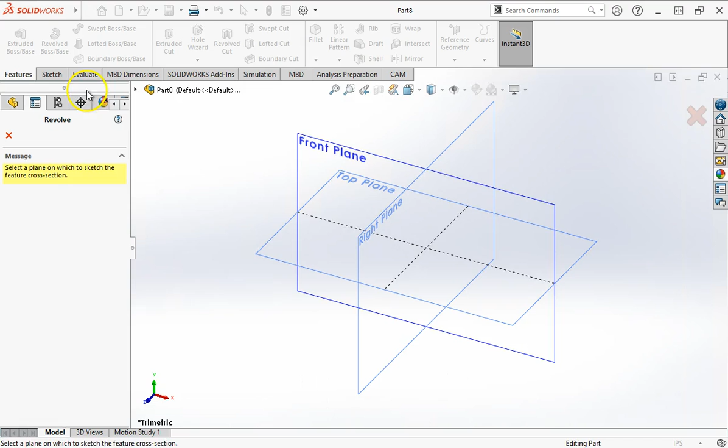For this video, I'm going to start off by making a sphere. So, Revolved Boss/Base, located up here in the Features tab. When I click on that, I'm going to go ahead and select the front plane.

Whenever you use the Revolve tool, the first thing you need to do is draw a center line. I might as well draw that center line now. What you're going to do is draw something and put it on one side of this center line. Then when you go to extrude it, instead of that shape extruding out, it's going to extrude around that center line.

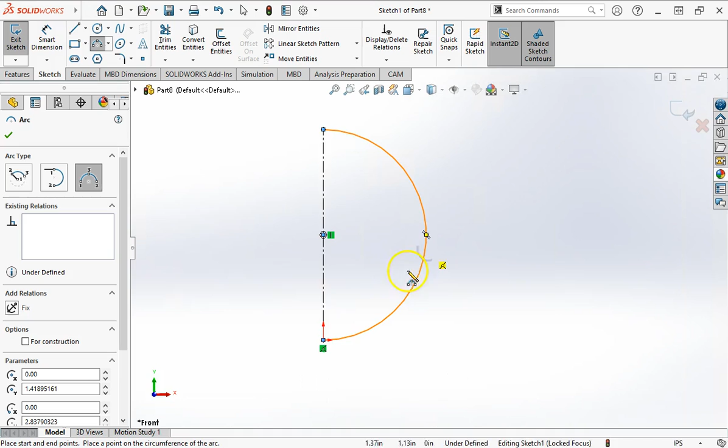So if I wanted to make, let's say, a sphere, I could go to the 3-point arc tool and make an arc from there to there. When I click Exit Sketch, it says the sketch is currently open. Do we want to close the sketch? Yes, we do. So I'm going to click Yes.

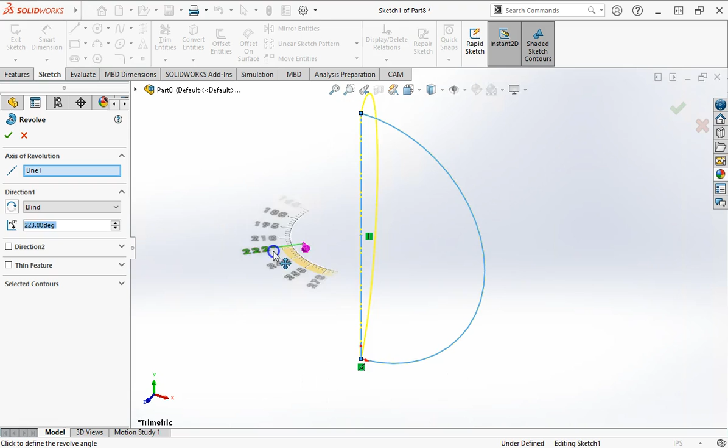We can see what happened: that half circle revolved all the way around the center line. You don't have to go all the way around. You can adjust if you just want to revolve, maybe just 180 degrees. You could do something like that, or you could just go full 360 degrees. And there you have a sphere.

Let's try a little something different. I'm going to go Revolved Boss/Base again, and let's go and make our center line.

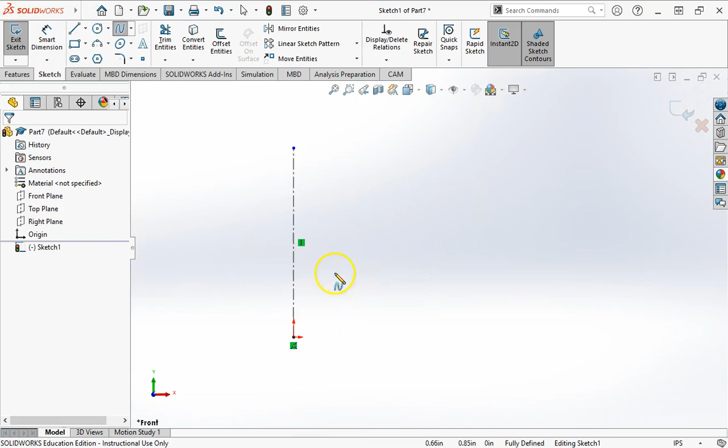Now you can do it with line tools and spline tools and things like that. The thing you just have to be careful of is when you're drawing, make sure you don't cross over this center line. So you'll notice when I'm doing this sketch, what I'm doing is I'm keeping everything on one side of this center line.

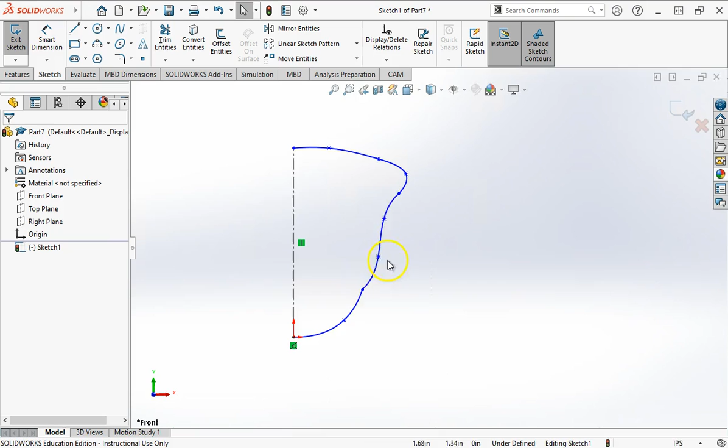I've kept it all on the right side so that when I click Exit Sketch, I can click Yes, and then it's going to revolve around.

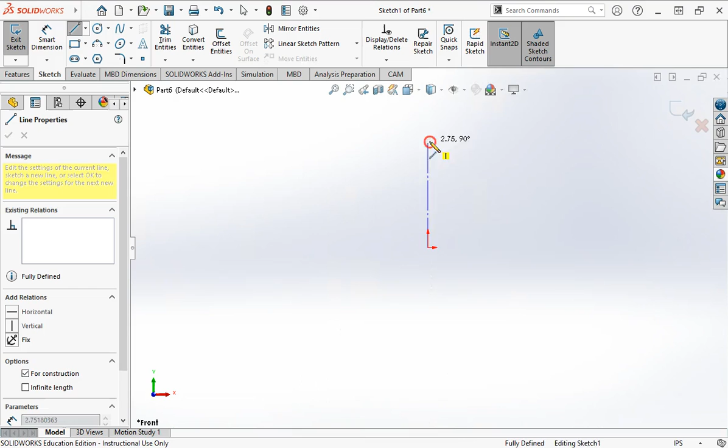Now in both of those cases, you noticed I would start off with my center line, and then my shapes were kind of attached to the center line. You don't have to do it like that. If you want to, you could draw a shape away from the center line, something like that. So it doesn't have to be touching it.

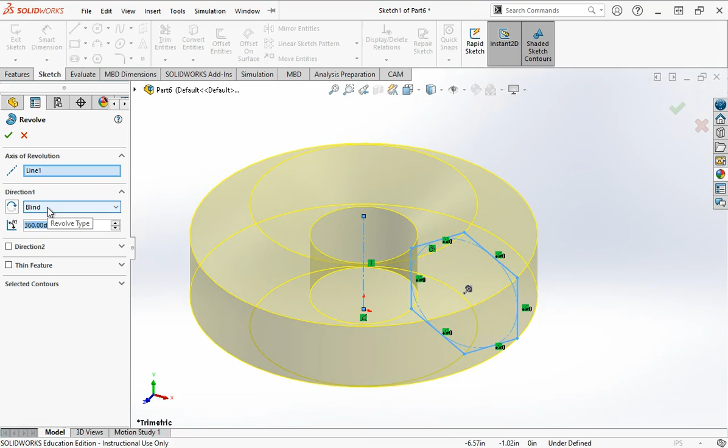And then when we exit out of our sketch, we can see that shape is going to revolve around that center line. Just for this last example, I'll show you if you just do a partial revolution, like 180 degrees, just in case you don't want it to revolve all the way around.

So hopefully that was helpful in showing you how to use the Revolve tool.